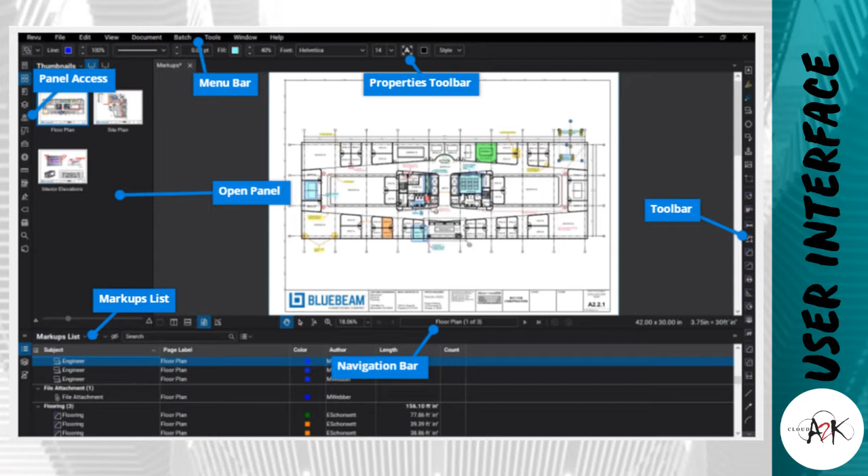But the big thing for Bluebeam is we're going to jump into using the tool chest. We're also going to be using, down the bottom here, Studio Sessions. And then lastly, we're going to open up the markups list. So with the markups list, what I really want to point out to you guys is you might just be sharing drawings and doing some markups, but I really want you to have a think about the data inside the PDF.

And what I mean by that is if you're using AutoCAD, you've got attributes you might have in the title block. It's a bit of smart data that you can use within AutoCAD for printing or for blocks and so forth. In Revit, it'd be your parameters. And if you're deep inside Revit, you can see the power of those parameters and how you can manipulate a model, then this is like a BIM light. I'm not going to try and compare it to Revit, but the data is in there and it can be manipulated. And who said what?

So as promised, not too much on the PowerPoint because I'm more technical and I find that pretty boring pretty quickly. So let's jump in there. Just see if we've got any questions coming up. All good on the chat, nothing running.

Okay, so Studio Sessions. If I jump into this little logo here, Studio. Actually, I'm going to jump out first, go to my preferences, go to my servers and sign out. So Studio Sessions and Studio Projects are both on the cloud, on AWS, the Amazon server. Studio Projects is effectively like Windows Explorer, but on the cloud, or like Dropbox or Box. You can put folder structure in there and any type of file you want, movies, PDFs, Revit files, CAD files, stuff from MicroStation. It just saves stuff on the cloud.

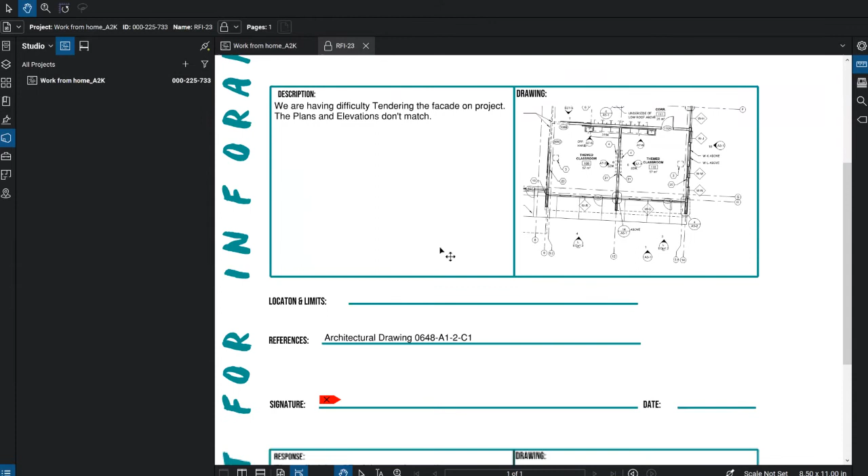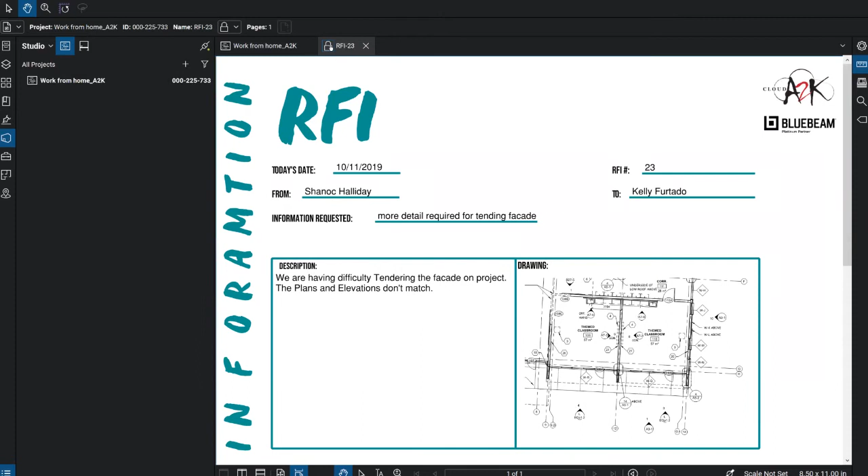And I'll go through this in another workflow in a moment. But what I want you to pay attention to is it's got a lock. So in the case of Studio Projects, it's a one in and one out type thing. So if I want to make an edit on this, I have to click on this and check it out, and then check it back in again.

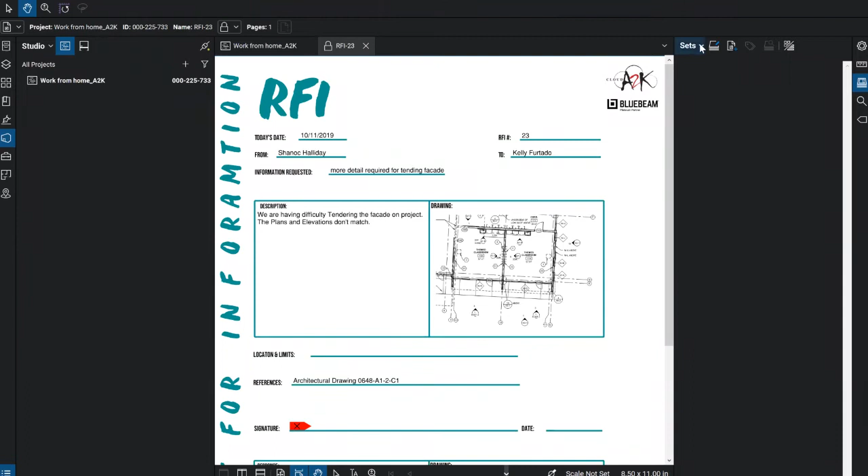Let's take this further and put a bit more information than just an RFI. So how about we go into another part of Bluebeam, and if you haven't used sets before, on our YouTube and on Bluebeam's, you've got sets and how they work. And there's some really good blogs out there as well. So I'm going to start a new set.

I'm going to add from my, now I could go from SharePoint, from an actual project itself, or my computer. If you want to log into SharePoint, there's a couple of tricks to get inside there, but it's pretty straightforward. Jump onto my Captain BIM CAD blog, I'll put some steps inside that. And I think they're inside the Cloud A2K blog we recently put out as well. So I'll go into my computer.

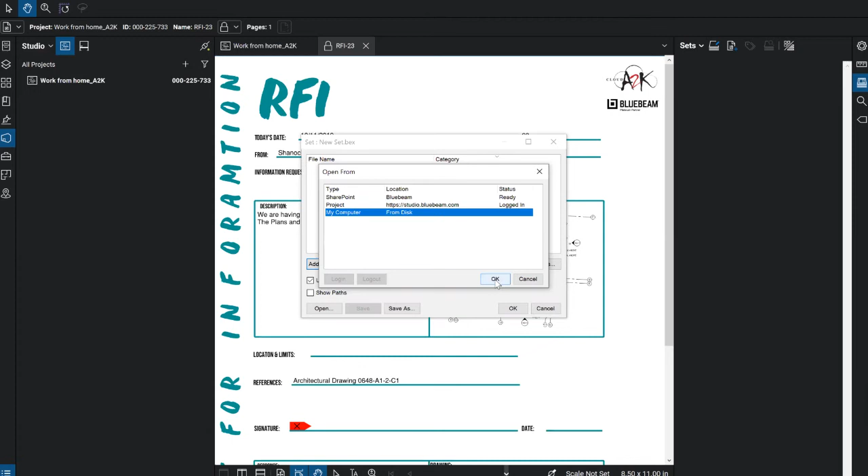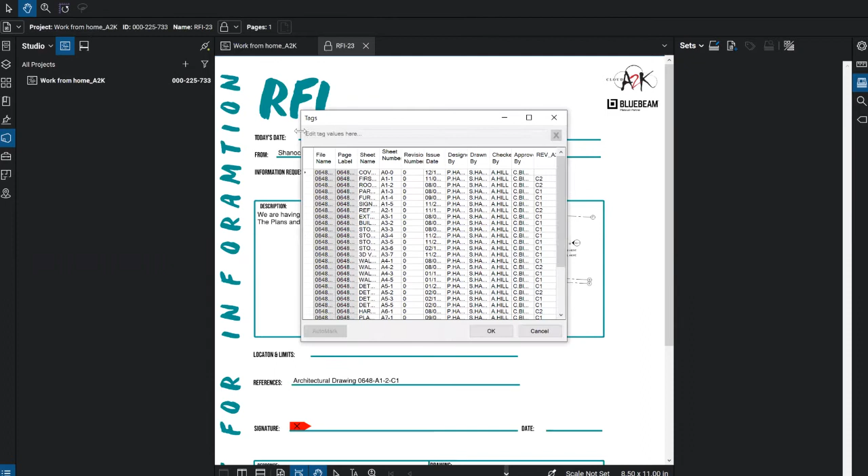Okay. And now we want to get into my Bluebeam and demonstrations. This one, I want to get a big project, PDF files, and latest architectural drawings. And I'm going to put these drawings into a set. A set is simply a document management system. And inside a set, we can have tags, which are effectively like parameters. And we can put information in about who's drawn it, who's checked it, revisions, and so forth.

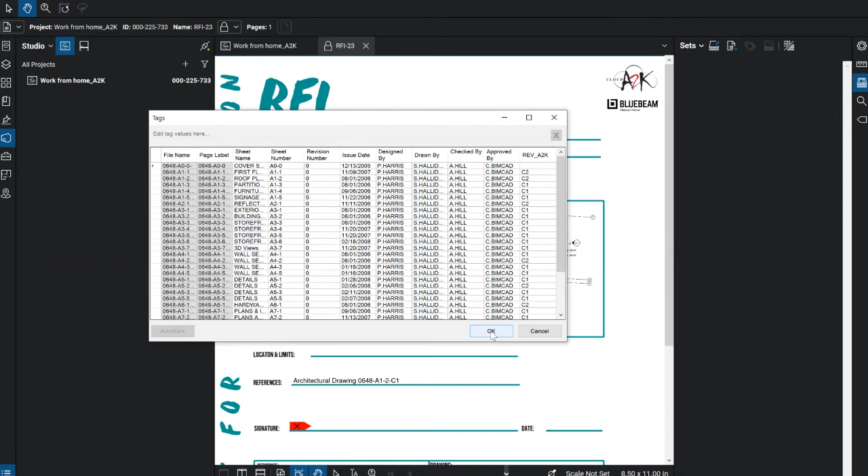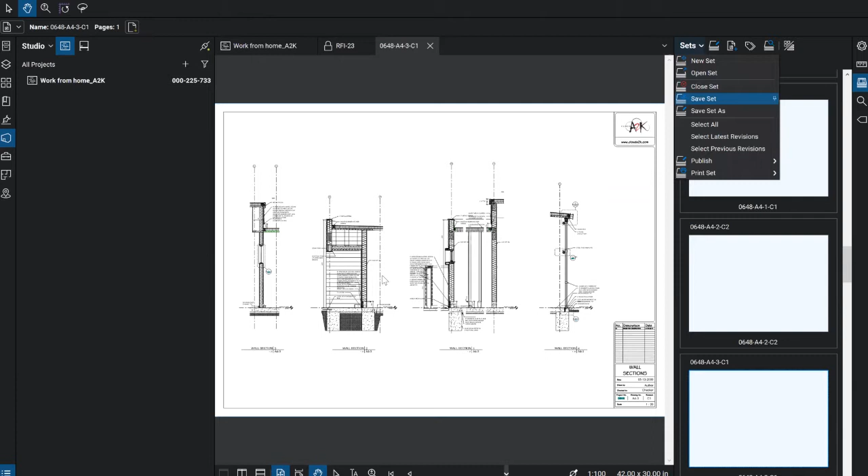What that means is we've got an opportunity to have something that we can then hyperlink around to other documents. So I want to save this to the project. So I go to my sets, save set, make sure you have this set up because I've got a project already open. Okay, I definitely want to go into here. I could then save my set to here. So I'll do my work from home. Whoops, capitals would be better.

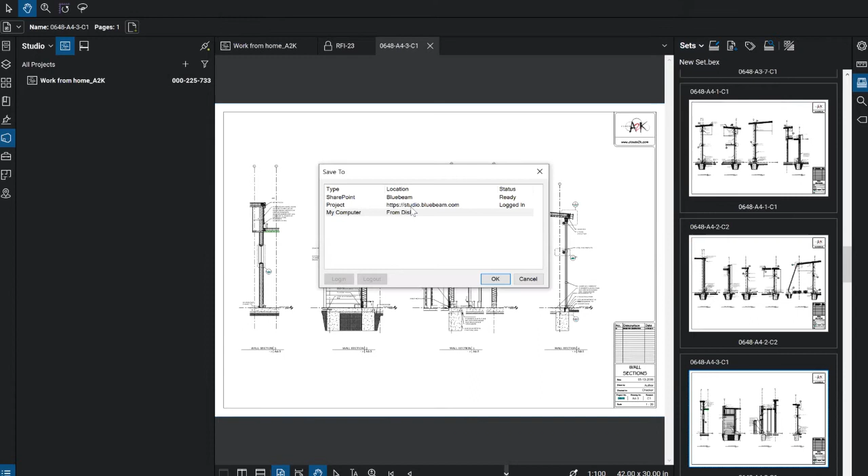If you're not too sure about sets, just while this is saving, I'm going to save as, where are we going to here? Computer, bear with me. File, save set, logged in, okay. Okay, uploading, that's better. Didn't give it a good name, sorry about that. So it's going to put that into our work from home, and there's our set.

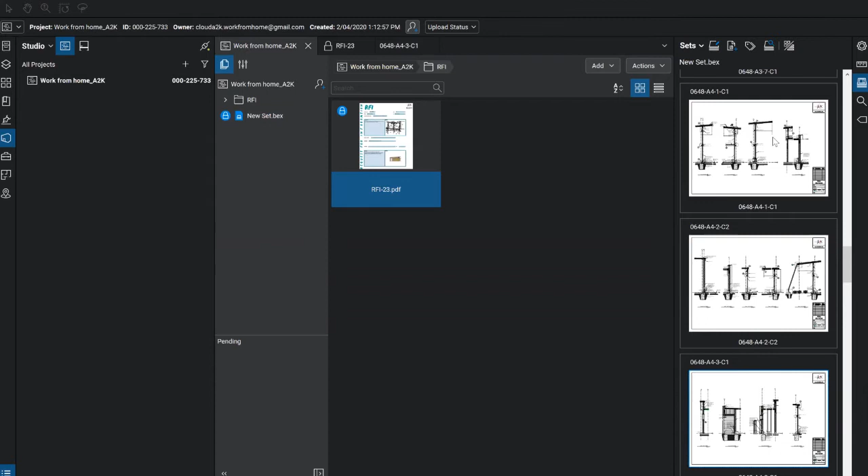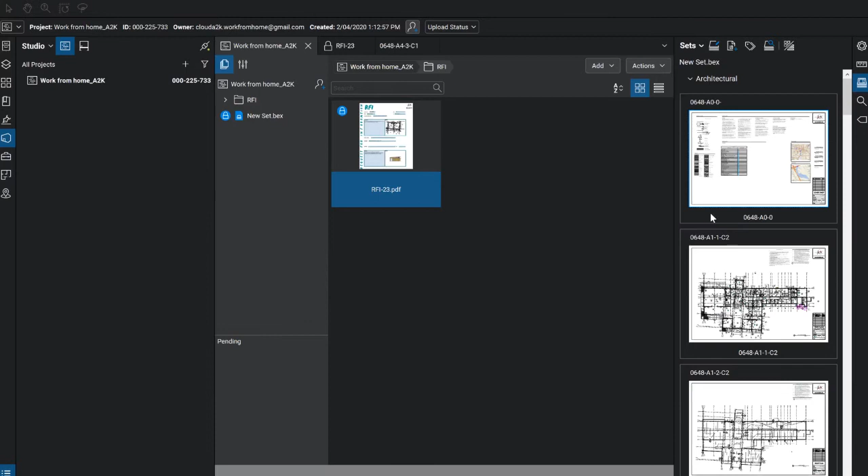Sets enable us to have an architectural set of drawings, mechanical, electrical, landscaping, specifications, whatever you want. It sits in here, and they're just individual files, but they behave as if they're one big file. The good news, especially for Studio Projects, is it means that I can open this up and I can use this to hyperlink around. So actually, I'm going to close this set, close that, sure.

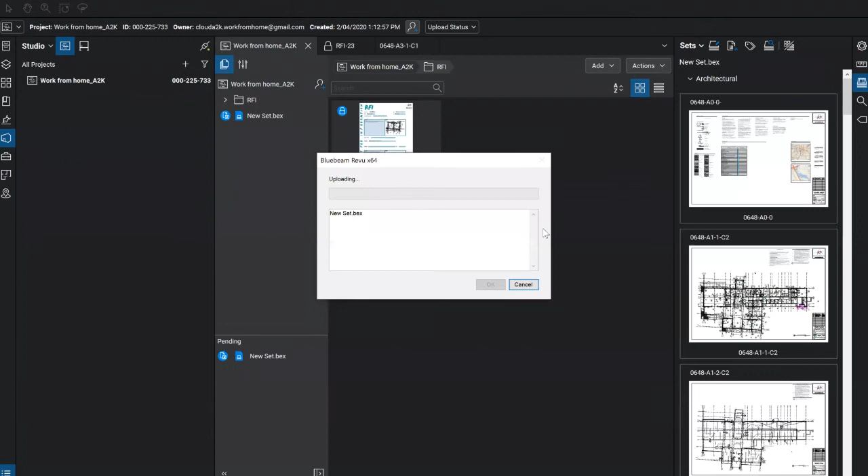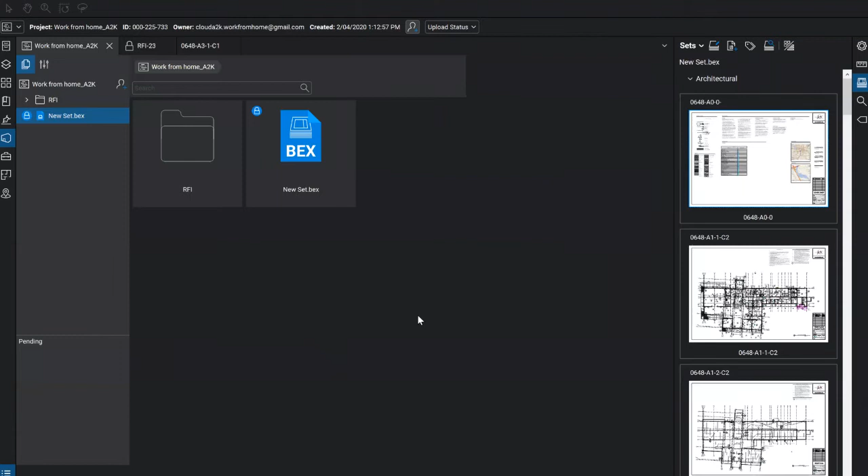I'll go for my work from home. Oops, just go away from my upload, sorry. Set, so now I can go to my new set. I wish I'd given it a better name. Click on that. So that one link will then open up my sets. So then in my sets, I can open up my document. And I can use this to hyperlink around my project.

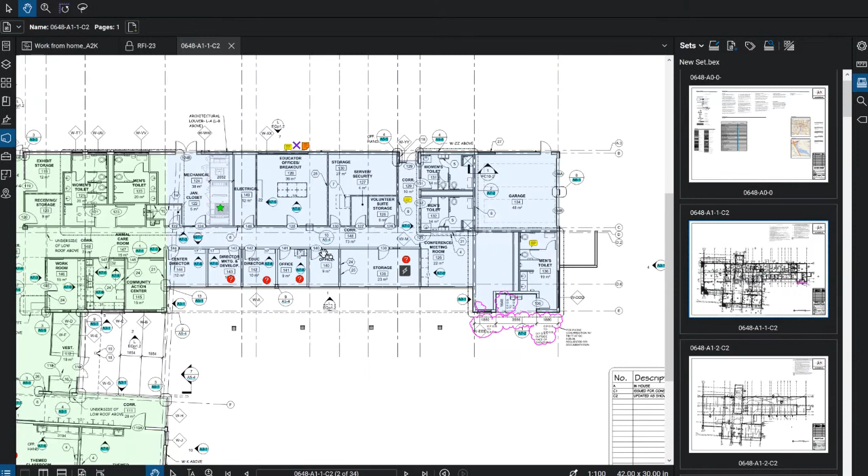I wanted to show you something as well with the sets, and that's in regards to this RFI that we have here. So if I did have an RFI, there's people working on site as well. So if they've got access to the internet on site, they can start getting onto these drawings, and maybe it's an RFI they want to do. Let me see, if I use the tool chest, I'm going to go down to my site RFI.

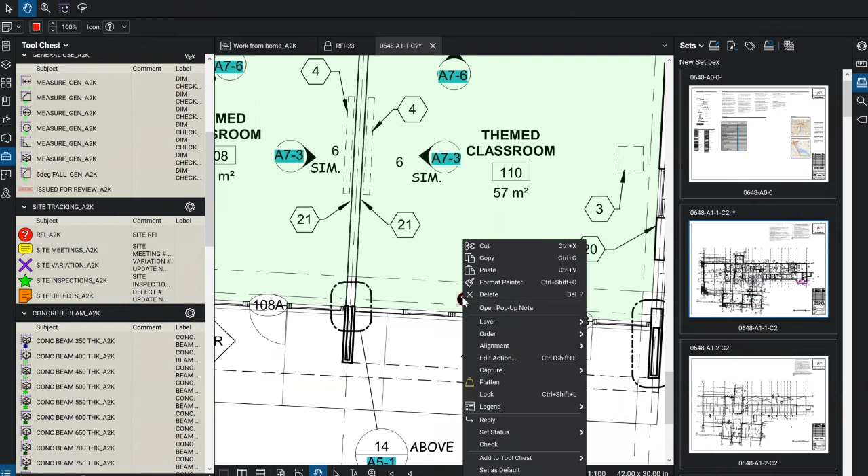Inside this, I'm going to type in there, I must remember, Jade, to change that from the green text. RFI number 23, facade issues. So I'm using this little note as a breadcrumb to tell a story of what's going on at the site. I can then right click, edit action. I can actually ask this to open up another file that's in my project, or maybe from SharePoint, your local computer, and say in my RFIs, I want you to open this up every time.

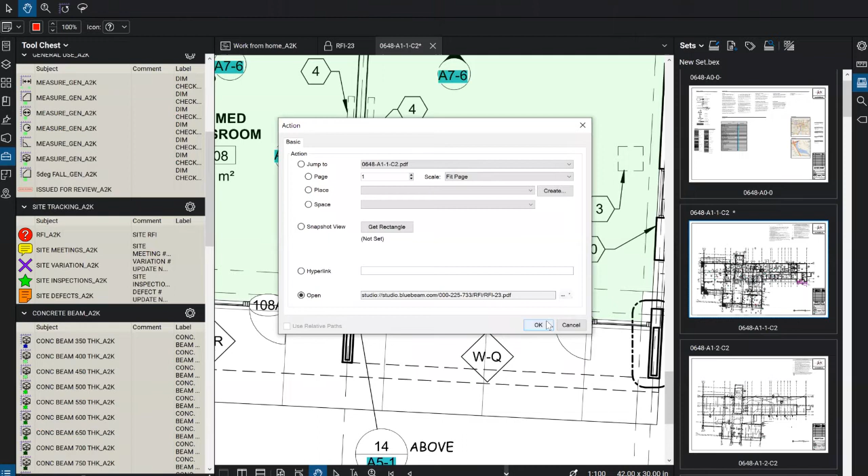So what I'm getting at, as a collaboration tool for PDF, I always like to refer to this as a storyboard of what's happened on site. How did you build the project? What issues you had, whether you be an architect, an engineer, the builder, or a subby, we each have a story of what happened on site. And let's be honest, it doesn't ever go smoothly. There's something going wrong. So how do we capture that so we can do variations later on, or obviously mitigate blame to someone else, because unless it's a carport, you're going to have an issue. So let's look back later on that you might have a,

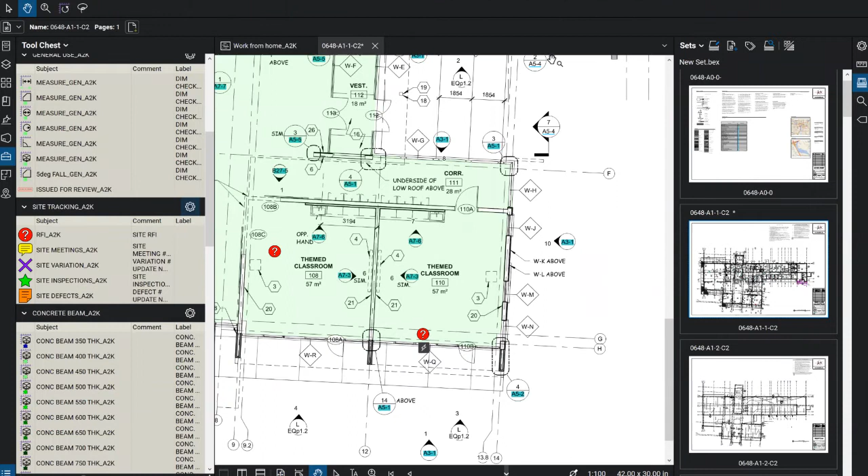Jade's asking if you're inside the session. No, I didn't invite you to this one yet, Jade. I'll invite you to the next one.

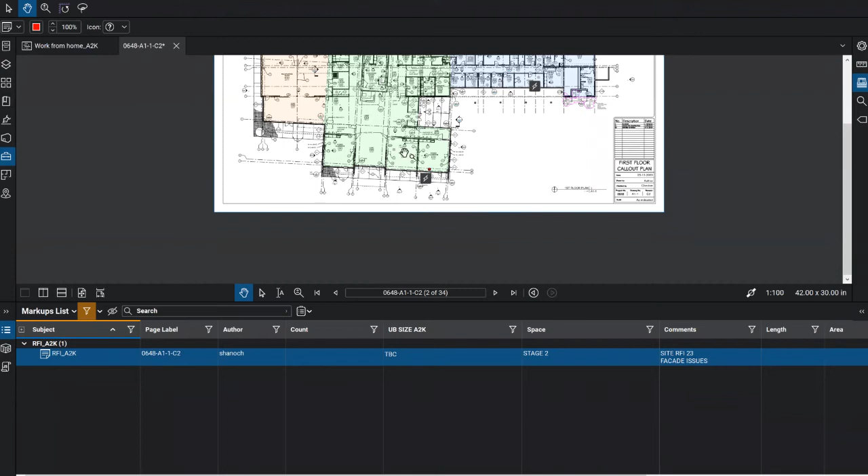So we will be inside this, and just think later on, you might be looking through drawings, and I can do a search here. I had this little issue yesterday. All right, I can go through here. I can do a filter. I can find all my RFIs. And here's my RFI I had about my facade issue. So we're using this like Excel to find information. So now I jump on to this little action. It's asking it to open up like a hyperlink, like a web tool.

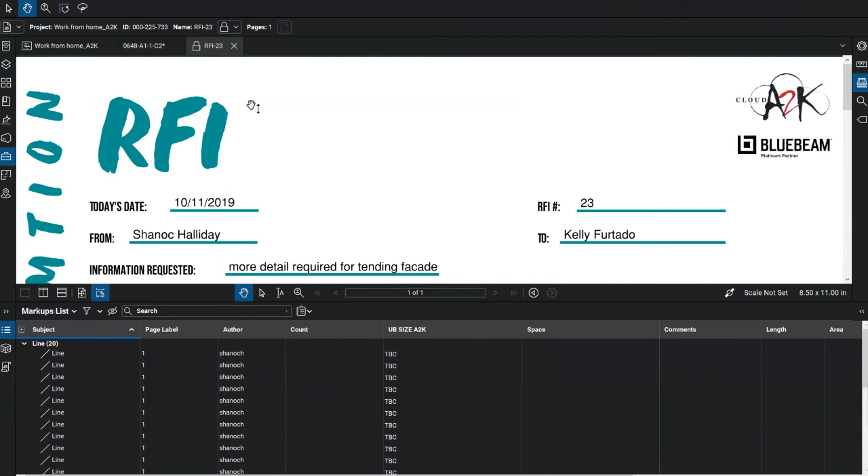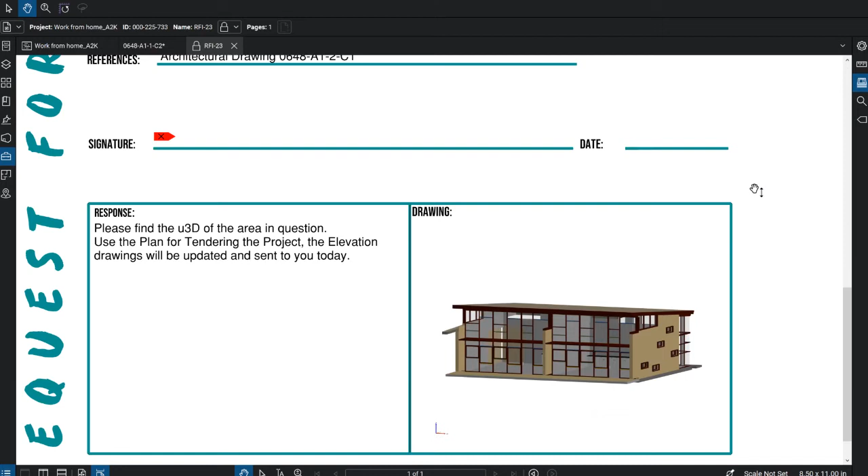And here's that RFI. So what I'm getting at is, you don't even need to check this out of the drawing. You can just have it as a tool that you want to hyperlink around and see issues from site. And there we can see, RFIs come back from the builder. I've got a 3D PDF inside here and answering things to the RFI itself. So now expand on this. RFIs, defects lists, variations, site meetings. You can now make the plan of that level the minutes of the entire job construction. Here's the history of the project. And we can all keep this on the cloud and share this around and access, dabbling in and out.

I must admit, there's one in and one out, okay? There's other workflows if you have to export a markup and put it back in later on. Let's see, any loose ends I want to get to on this? Projects, working from home, invitations. All right. Any other questions on this at all? Anyone got anything you want to bring up about this before I jump onto studio sessions? Give you time to write down if you want.

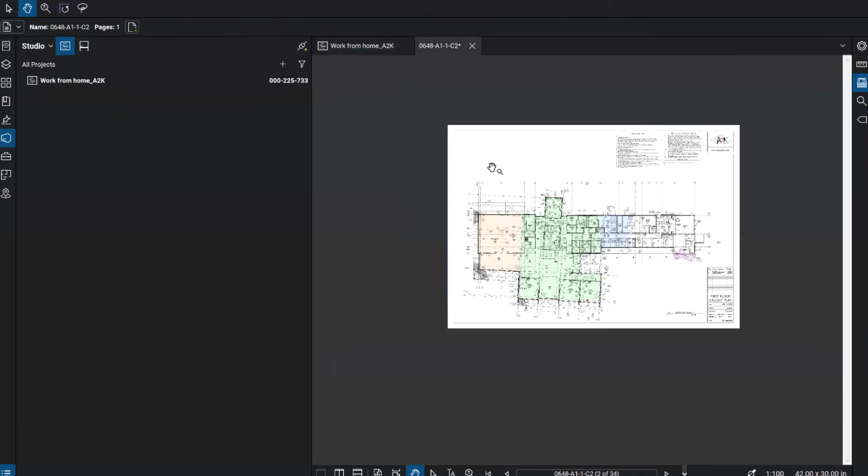So I'm going to take this now to the next level and create a studio session. It's very similar to what we did before. So we've got add and we've got our filter. And with that add, we've got a new session, or you might join a session. So if I do a new session, let's say it's a work from home cloud A2K. Inside here, I can start adding files. So I can add the open file I have in here. I'm going to wait for this to, no, I'll upload it. There it is. Get that one inside there. I can put in options other people have. Now, studio sessions is definitely set up for time periods. You can put a time bomb on when projects are due.

This is a lot of infrastructure are using this, where all markups must be completed by Thursday night, so we can start drafting on Friday and issue out for Monday morning or Friday evening issue, or whatever sort of reverse engineering of time you want to do. We can also look at restricting the attendees to this. So I'm going to say this is unrestricted.

So when we create a path, honestly, if you've got studio sessions, I'm happy for you to jump on in and just do some markups, because we could talk about how you collaborate with one another. I do ask you, put good content in there, because whatever you put in there, I can't delete. You'll see what I mean in a moment. So that's taking that to AWS, setting up all the protocols and permissions that we need to have done, and it's going to send back to me, and I'll have my studio session.

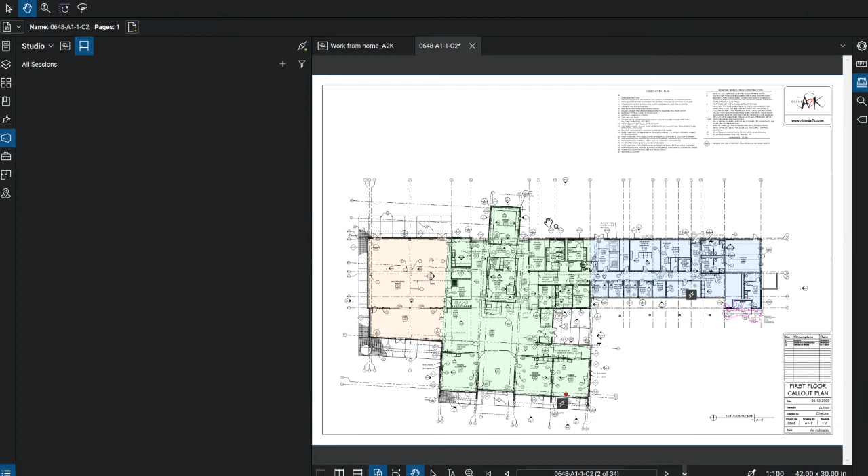Need some thinking music. Here we go.

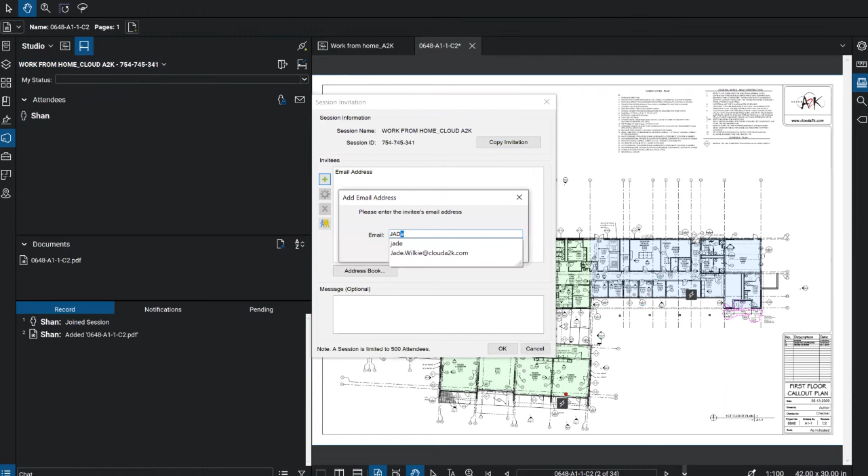Done. So for anyone who wants to join in, and you've got Bluebeam Studio and you have your account, if you punch in 754-745-341, you can jump in as well. Equally, I could copy this invitation and put it to my clipboard, or I can actually email people, and that's going to send an invitation to Jade.

That was also to point out the invitations. So you can do it as groups as well, just like within studio projects. You can do the same thing for studio sessions. Let's look at some of the permissions inside here. So in settings, we can change our name again if we need to. We can put the expiry date or take it off. I'm just going to keep that on here. So at 5 p.m. today, this will be shut down.

Here comes Jade. The attendees who are allowed in here, this is unrestricted. So once again, jump on in. And permissions. So I'll say, can't add documents, and you don't have full control, but you can do markups. You can save anything inside here.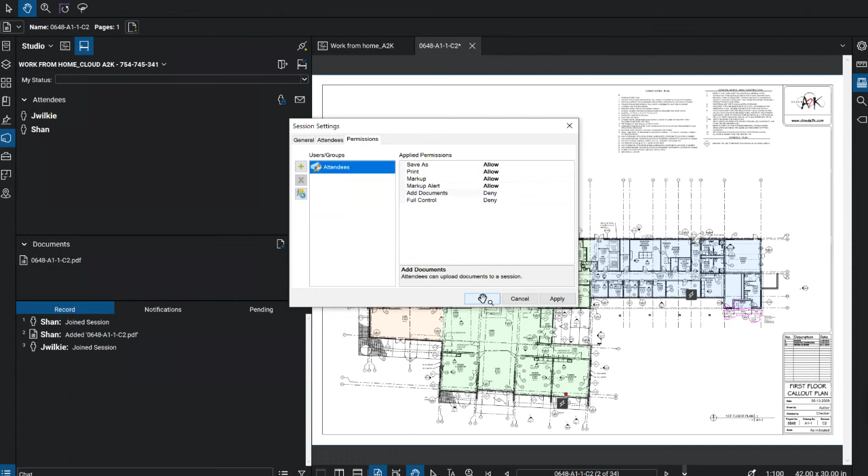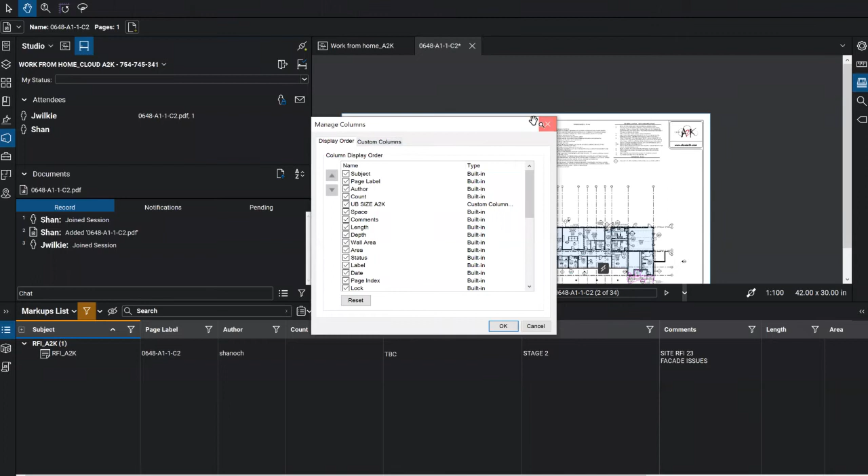Okay. Now, one tip with studio sessions is that if you've been using Bluebeam a little bit already, you might be using the markups list, right? And you might have tapped into custom columns. If you go into studio sessions, there is, whoops, let me get this one in here. That one's not it. That's just a regular one. Let's go into one inside the studio session, I'm sorry. If I go into this document, just to point out, I had just a regular project open, not a studio session file. So let me close this one down.

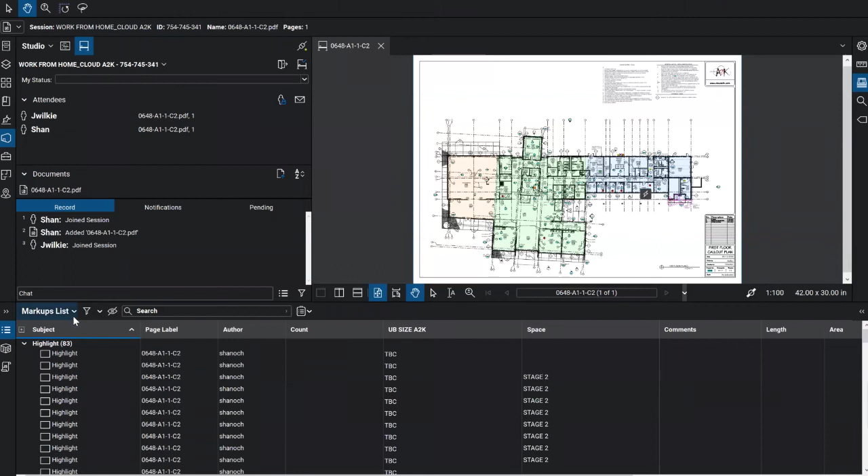If I go into my columns, manage columns, I no longer have something called custom columns. That's to say that you cannot customize this area once you're inside a studio session. So if you have particular things, like this is my custom column, UB sizes, or a quick one to flag is a responsibility custom column for review, keep that in mind. You can Google it, because there's plenty of good demonstration videos out there on YouTube of what responsibility choices are and how to make them. Just a nice little workflow there.

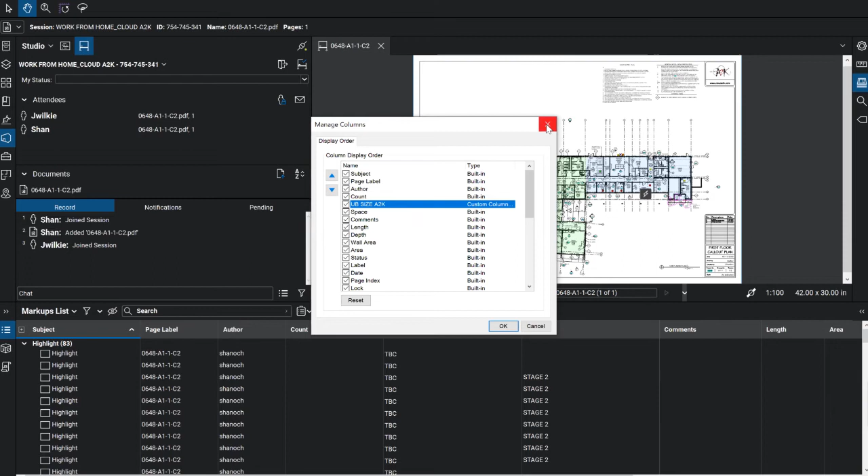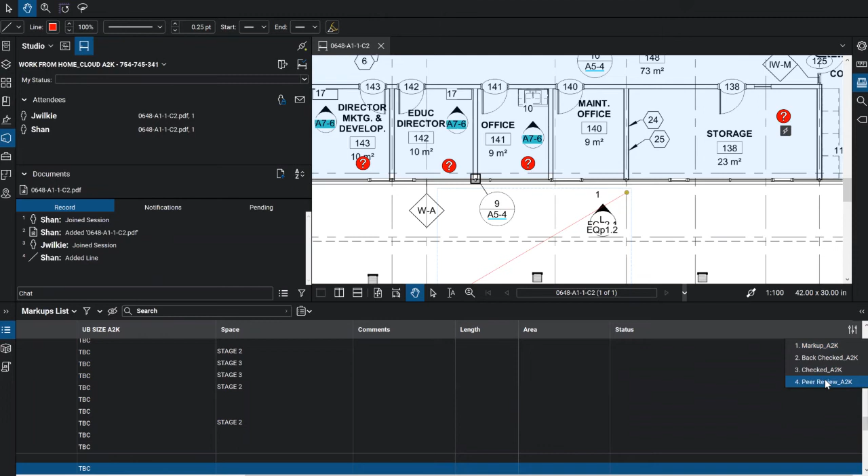And also, anyone who's used statuses, you'd find out that statuses inside here, you cannot edit them. If I do a markup, do a line, I want to go into my statuses. I cannot edit statuses. I only have the standard ones inside the system here. So statuses are another way of doing colors. I'll go through that in a moment. All right, that's enough about a bit of back of house there. Let's talk about some markups.

Bit disappointing, guys. I thought someone might jump in by now, apart from Jade.

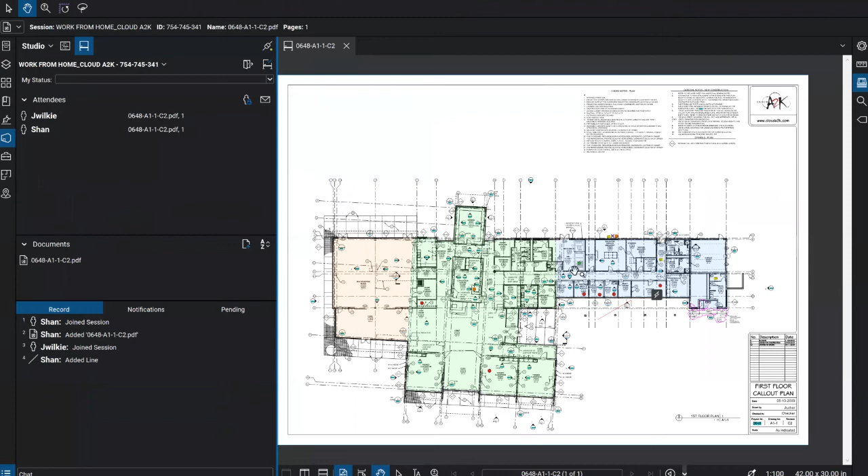All right, so any markup we do inside here, no one else can change. So even for these markups, I did this markup outside the session, so that's going to be locked down. So if I try and find, this is my own markup, I can delete this. But Jade, do you have a markup inside here yet? So if I go across, I get the author. Here's Jade's markup.

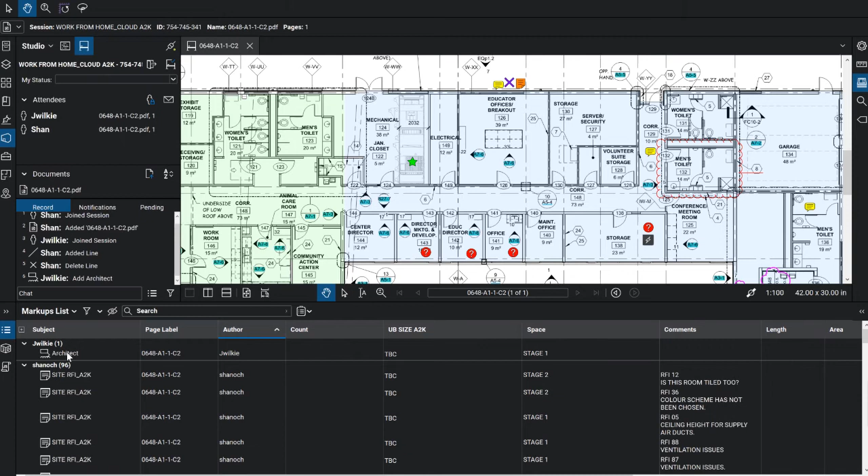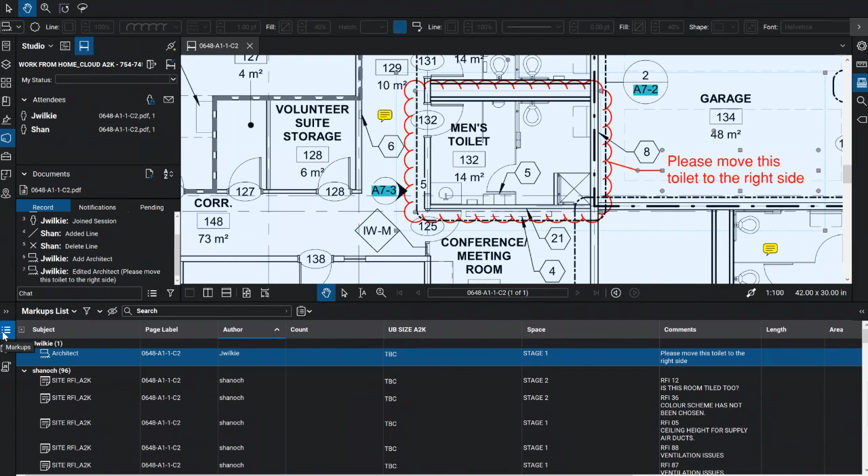In here, you'll notice that it's grayed out, little gray dots in here of how you would edit this, and I cannot delete this. I cannot make any changes. That's the way it's meant to be set up. It's for coordination between different consultants who honestly don't have to trust one another. So how do we make changes to this?

If I do not want to move the toilet to the right side, I can actually click on the actual markup, right click, and do a reply. And put inside here, I love it when I go and zoom, my reply seems to go into random places. There we go. Let's put in angry capitals. This has already been coordinated.

So what we're doing here is from a data point of view, we're having the one markup, but we have a trail of information. A very conventional method would be to put a text box here. So I'm just going to do T and then put my answer here. But honestly, that doesn't work too well because, oh, if I put an S in there, that would help. Because visually it works, we're right next to the markup.

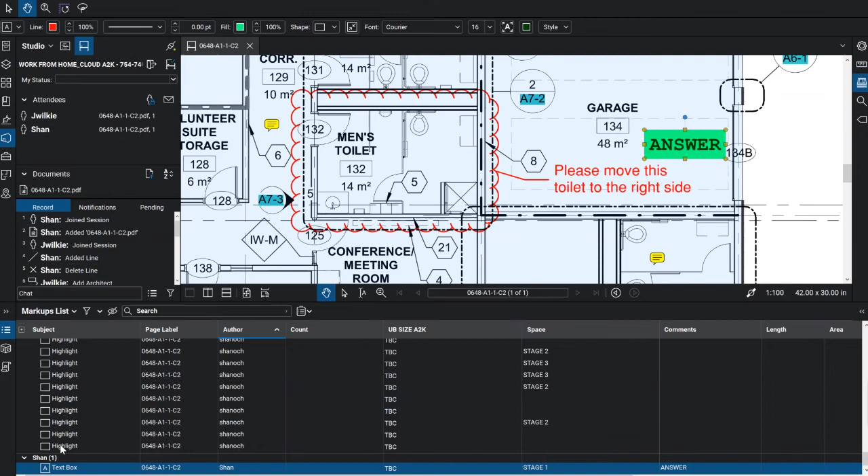But the reality is when you look at the data flow here, and if I extract information out of here, it won't combine these two as a logical markup. So reply works much better.

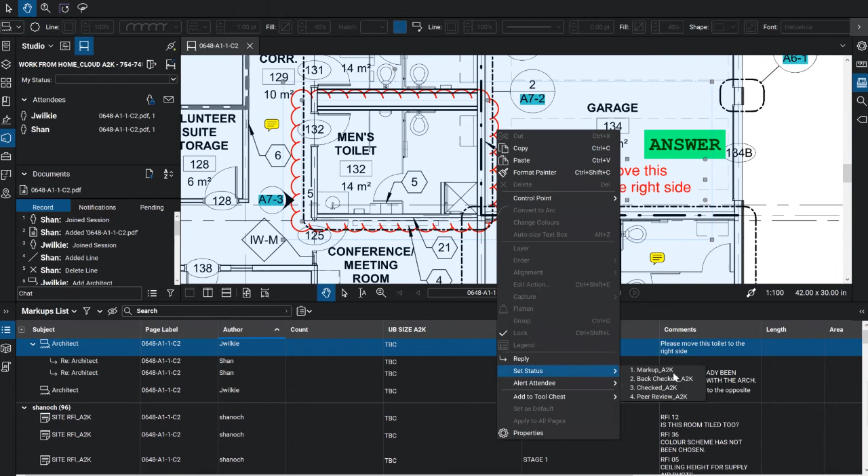From a working from home point of view, if this is Jade doing markups and it's in angry red, I can then go through the statuses and say it's been back checked. I've set these statuses up already, and there's on our YouTube, you can go into this. So I don't want to get too many technical details and overload people. But statuses we can set colors on. So there's my back check. I set my status that's been checked.

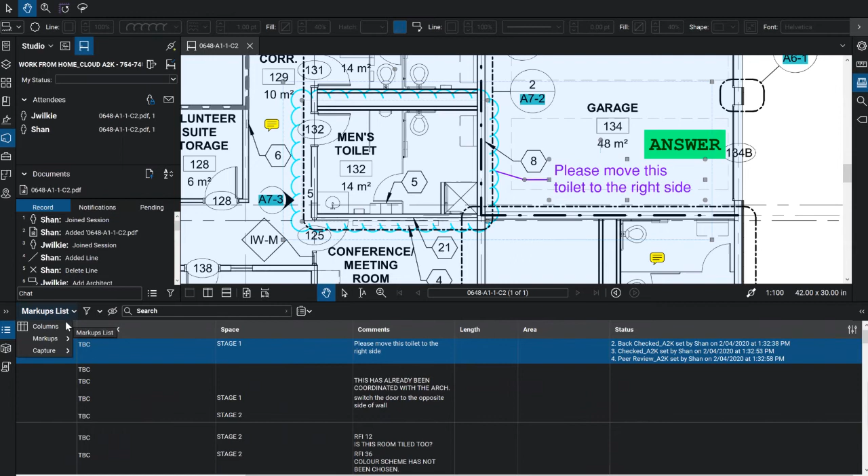And then in some companies I worked at, we've had a peer review. So what we can start to do is look at the data coming through this on our statuses. And I will point out here, I can drop some information off if I don't want to see the area or the length or the space. Might drop this one off and this one, keeping it simple or adding them in. And we can start to see the statuses. So it's got a timestamp of who did what and where. So what I'm getting at is you can have a whole people collaborating at the same time and keep track of who's doing what.

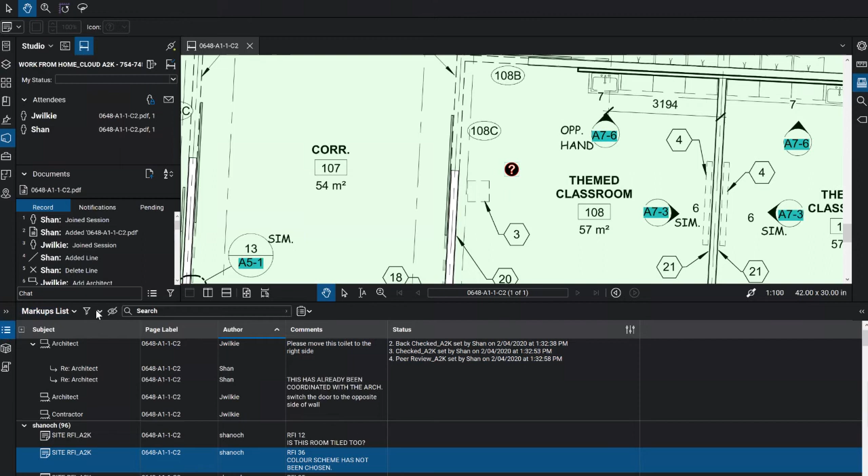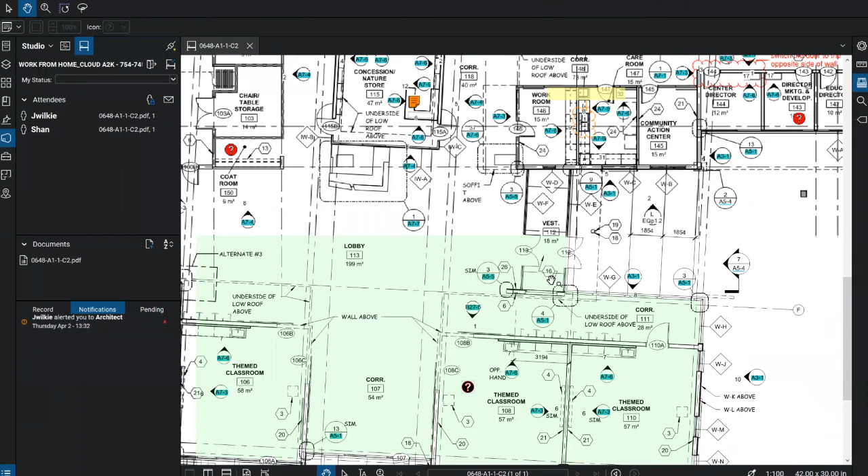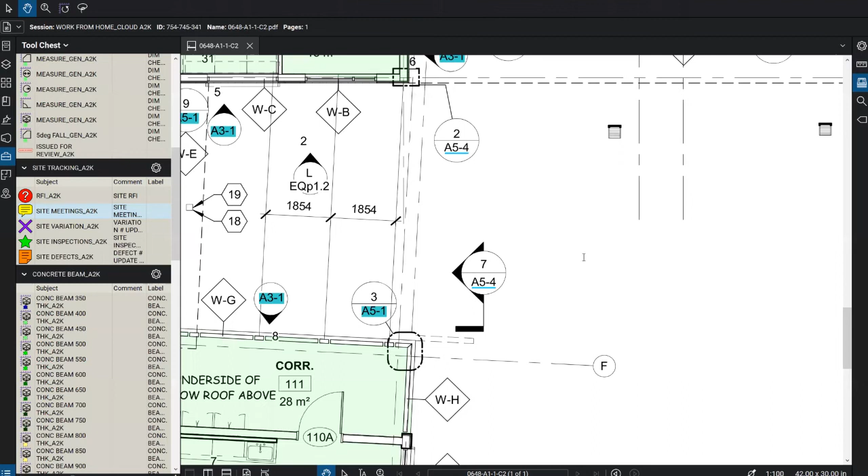Now, I wonder if I've got any notifications. Jade sent me a notification. So what this is, if I send one to her first, I'll show you how it all works. If I say, right, oops, I don't want to see that at the moment. If I do text, maybe I go from a tool chest, that would be a smarter move. Where's my markups? Did I not have it turned on? Here's some markup standards. I'm just going to put this into detail mode. I'm going to say it's an angry cloud and say update section mark. I think it's a number 18 or 16 instead.

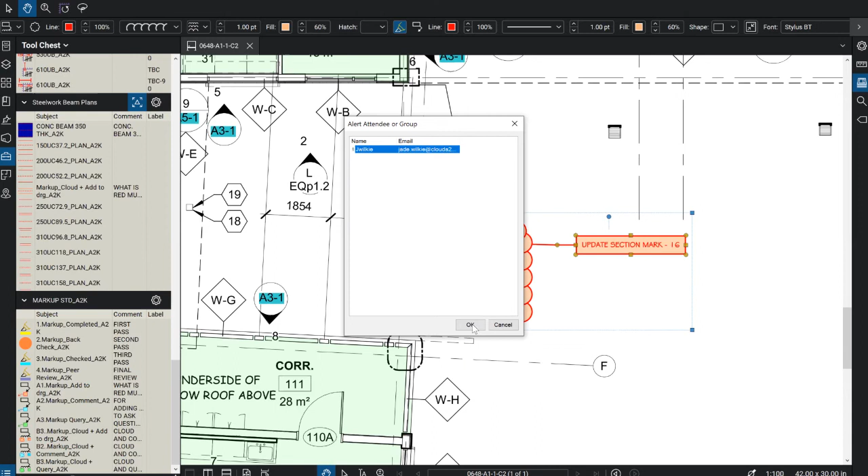But that can be something I can then alert an attendee, choose, and because Jade's jumped into the Studio Session at some point, she is now an attendee to this. So I can alert Jade to that specific markup. Now, because she's in a session, it's going to just come through as a notification here. So when I go to Jade's notification to me, it jumps straight to that area, which is great because you might have 75 sheets in here or 150 sheets or maybe only 3 sheets. But instead of having to sift through this, it's going to take you straight to that question.

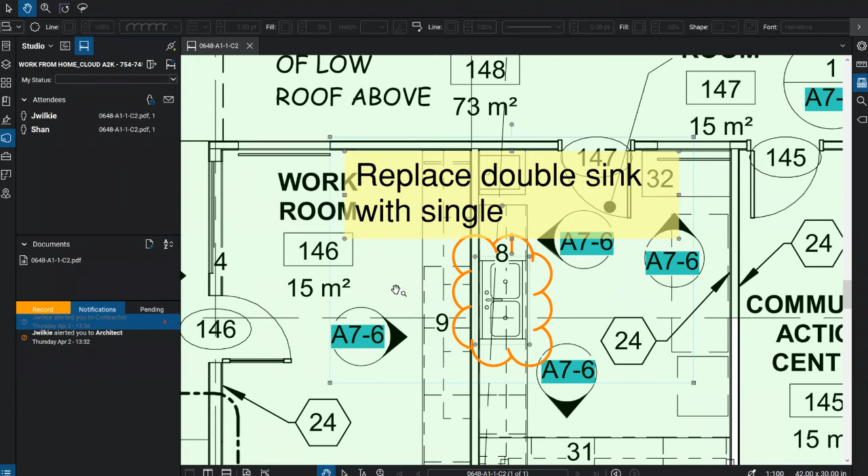So this comes really good also if you're offline, because then it acknowledges that you're not inside a session. So it uses your email to then say you got a notification about Bluebeam session, work from home cloud A2K, and from Jade or from Shan or whoever, and it will hyperlink you from your email straight into a Bluebeam session and log you in as well. So those credentials are set up and just quickly smash it out.

I've actually used this when I've created reports for clients. If they want to do some questioning back to me, instead of just doing a regular email, we actually put all the questions onto the report. Then they just send notifications to myself. So the report also becomes the minutes of where we want to take things further.

So I also think about the engineers I used to work with. Not all markups are correct or perfect, or maybe I just don't understand every markup. So this gives me an opportunity to query that markup and continue working on. And they can get back to that query in their own time.

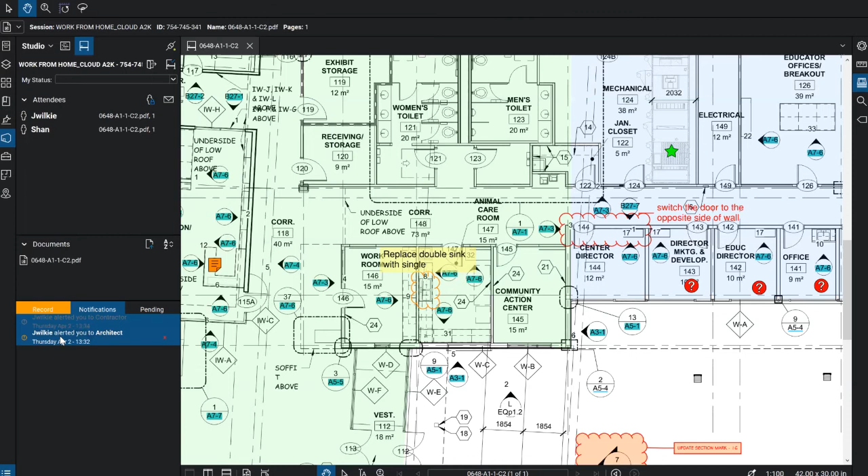What else you got for me, Joe? That one as well.

One thing worth pointing out: inside this is just one PDF, one drawing sheet. Inside a studio session, if you want to do things like hyperlinking around, they're not going to work for individual files as such. It's to do with the pathing back to AWS.

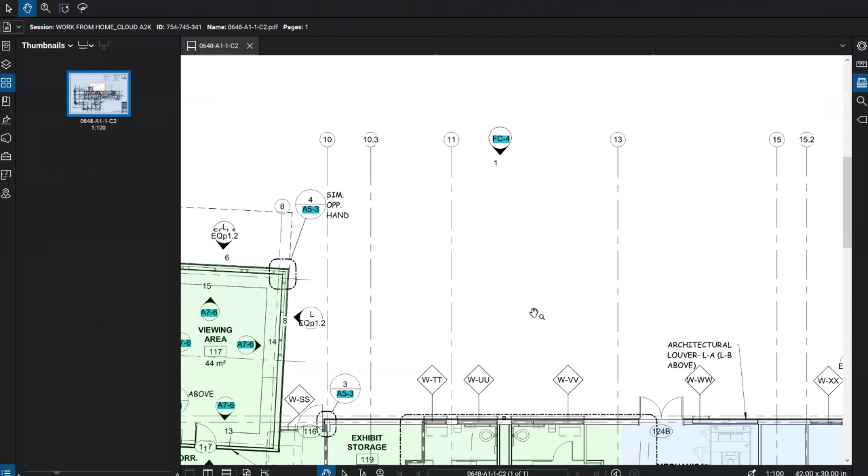So what we say is easier is to just combine. If you do a package of 20, combine them into one package. You can always combine them easy enough in Bluebeam, and break them back out later on. If the session is open for a couple of days of markups, you want to make it easier for people to jump around. So combine the files, set up some hyperlinks, and then people can quickly start smashing out all the markups and updating the Revit files, CAD files, whatever you've got.

How are we going out there? Let's see, no questions yet. Hopefully that answered you enough. That's good.

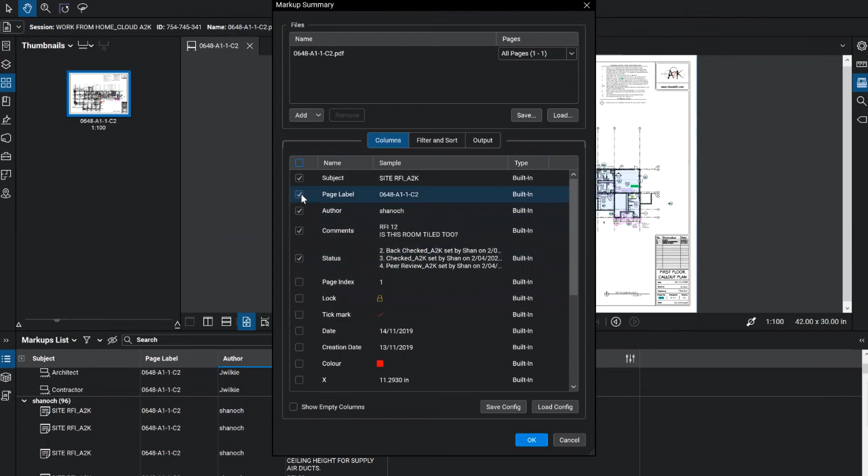So this is your mini Excel. We can say, right, I want to have certain columns. I don't really care about the page index, that's off, or the lock, but maybe the author's important. Actually, I think I need to have all these. But maybe I want to change it and have statuses up here instead. I just deem that as more important to me.

I can then look in the filter, and say we want certain information to come through - do I only want site RFIs, or do we want to put everything in there? Information about statuses - maybe you want to find out what hasn't been completed, so you can filter out everything else, or what is actually being peer reviewed. But let's keep everything on there to have a bit more information.

We can also do sort by. So I might sort by which author created it, or who it goes to, or by statuses. So you can see in order what's still a markup, what's still being peer reviewed, at different levels. And you can have multiple levels inside here.

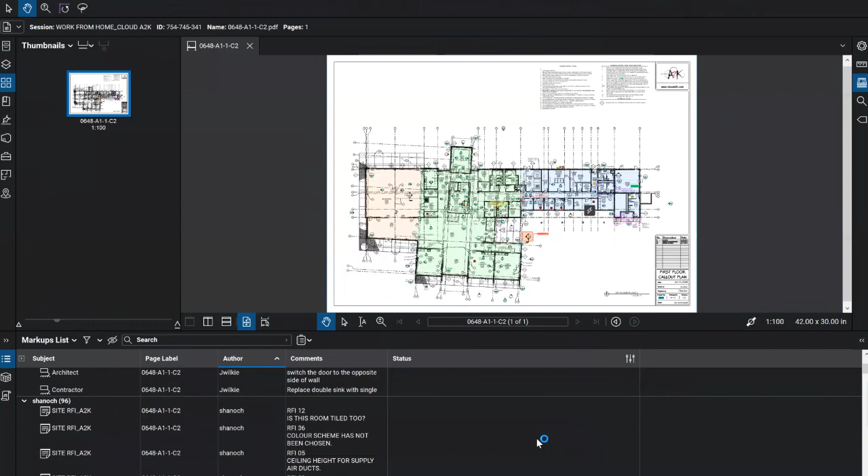So then we go to our output. Now I want to point out there's configuration - you can save this configuration and use it again and again, and share that configuration with your other work colleagues. Then you can always load it back in later on. So let's spit this out and wait for the Excel file to come on board.

And that's all the data we have from all the markups. A lot of companies use this information for quantity takeoff, but there's no reason why you can't use it for site variation lists. You can track them and send to accounts to see what's been going on, or for general site meetings, or just general markups - what hasn't actually been completed.

I've got 75 pages loaded. Quickly, Bluebeam to Excel, tell me what hasn't been completed.

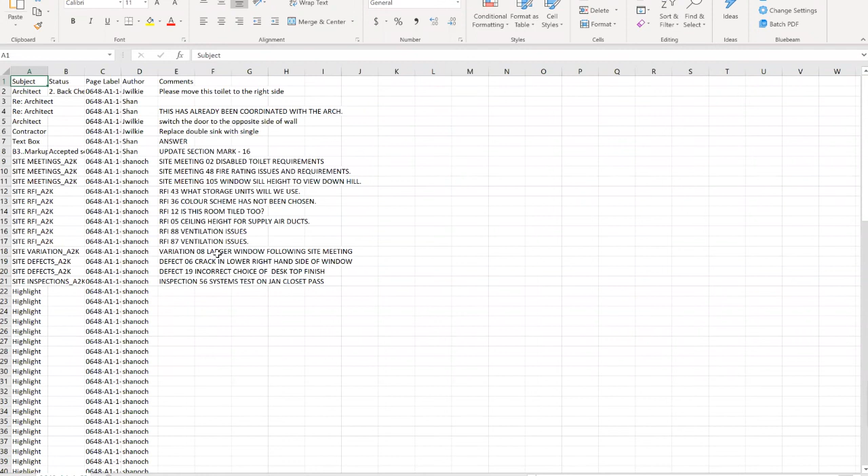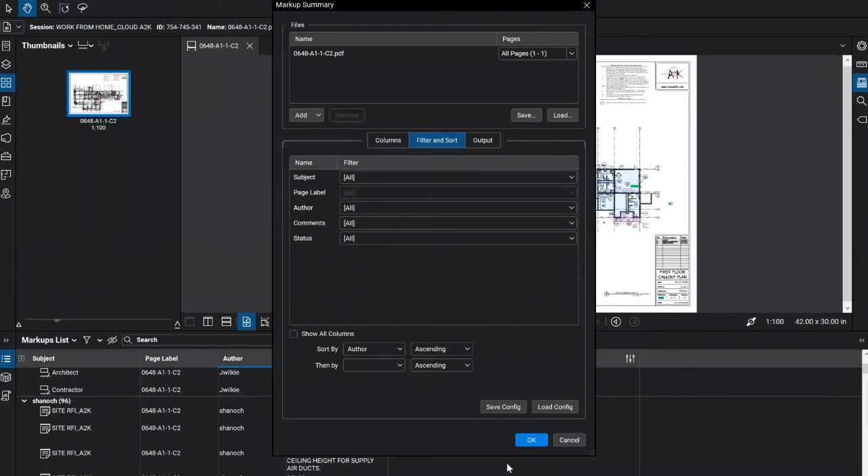There are other options inside here too - we can do a PDF summary. I'll just quickly knock out one of those. Normally you want to hyperlink it, but it's stuck inside the session, so I can't do that. These columns and filtering are the same as what we did for Excel. I'm just going to hit OK to have a look. It's telling me it can't do hyperlinks back to the session - that's perfectly fine.

These PDF reports are really good if you're, say, an architect and you want to do a defects list, specifically for the electrical contractors. So you can put a filter on there to say these are your defects for electrical contractors. And now I've got another one for the plasterers, or you could be an engineer checking what things didn't get approved in an inspection, and so forth.

I think the internet is going to slow down, so I don't really want to crunch this one now. Typically it's not too long, guys.

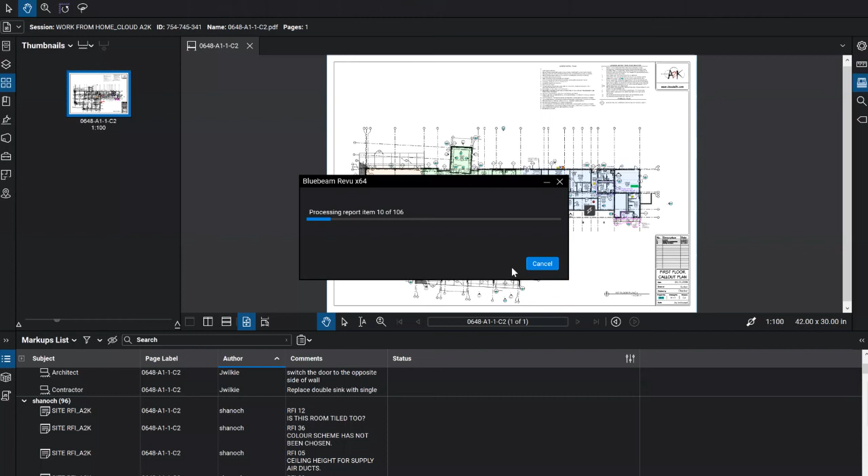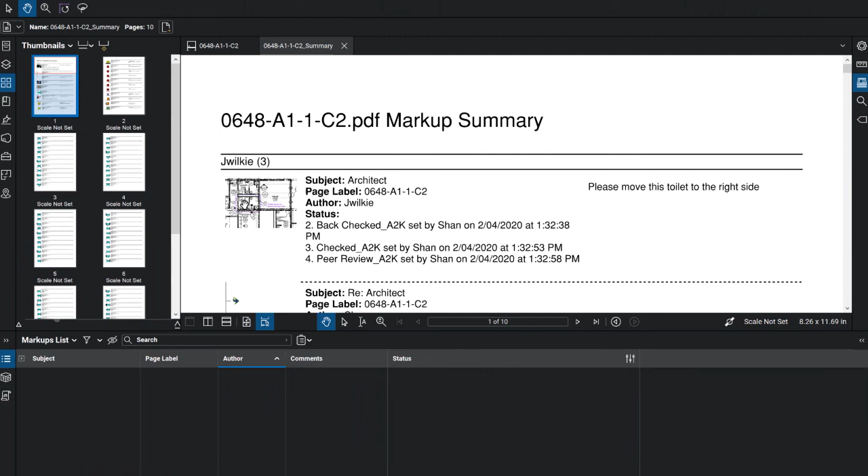There we go, so we have a little snapshot of the markup itself, whatever columns I had inside there, and the comments. It's actually a nice way of doing the minutes of the meeting. Here you can see where the replies come in. That's why using reply is better, because we can track the conversation and how we think it ended.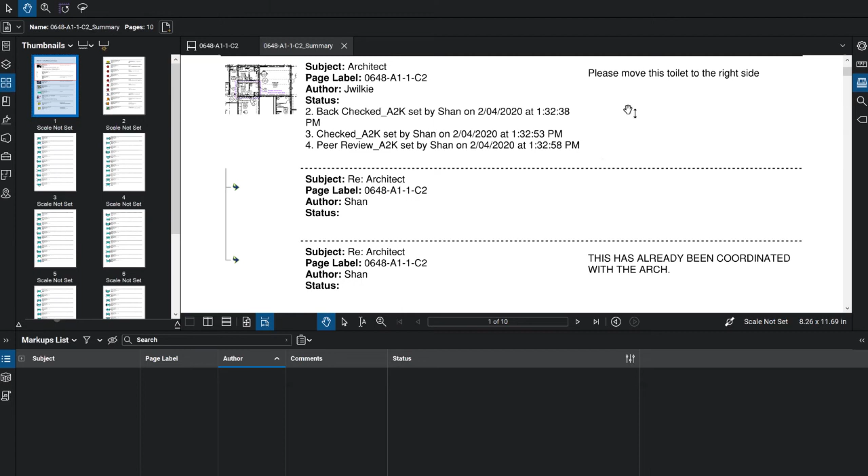Now, I think I've got a question on this. Can you add photos in each of the defects? Heck yeah, so let's get a photo in there.

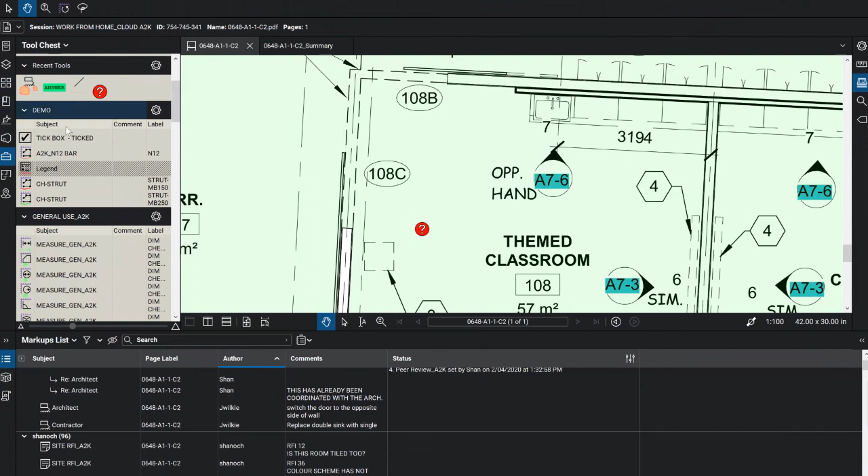So if I do this inside here, did I just... okay, I have to get a new one. I might be mixing up with Studio Projects. So let me come undone here, bear with me. In the tool chest, if I do any markup, it can have an action or a picture assigned to it. I can't do an action, but I can do a capture from file.

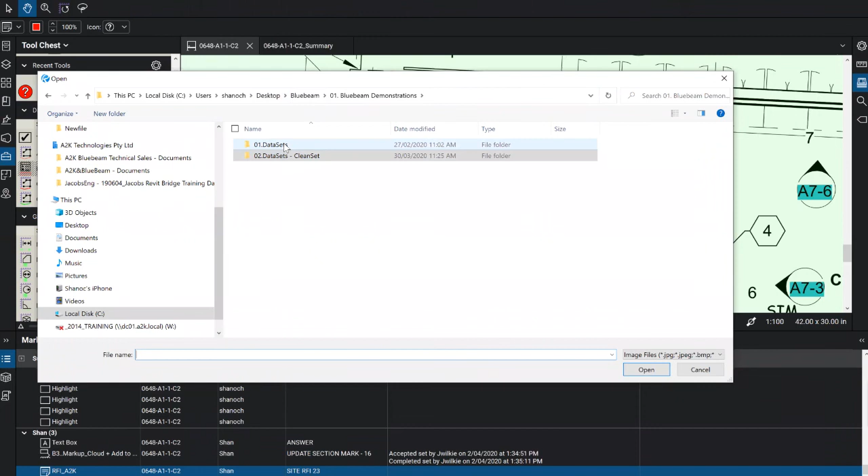So I'll go to here, go to my datasets, pictures, and I'll do this one first because it's funner - yes, I know that's not a real word - but you can then load in a 360-degree shot. So that takes this on now.

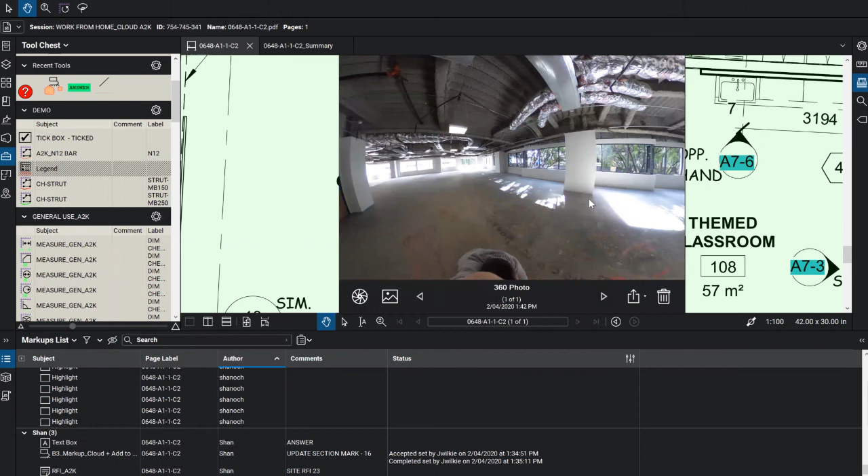And for the price of these cameras - we don't sell them, but they're not expensive - you get so much more information. Honestly, I think about risk mitigation. If you're just saying, look, we actually did all this ductwork right, this is actually just a godsend.

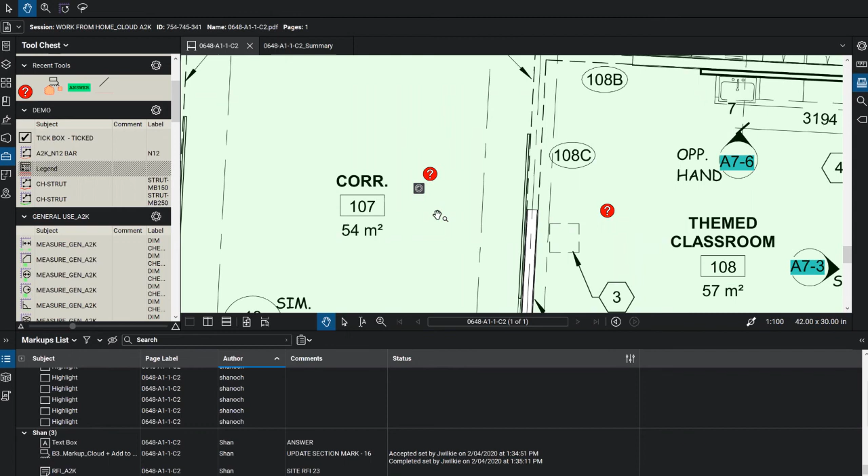You can also put videos into this as well, or just stagnant shots into this as well. So I'd suggest that you use the capture option, because you do not want to start sticking pictures on top of here so much, since everything inside here is important. You can't start covering information. I've definitely seen some clients do that as their own little report.

I'd suggest you tap into this, and when you do a PDF summary, these pictures will print up in the PDF summary as well. So that's a neater way to keep your PDF clean. Hopefully that answers your question there.

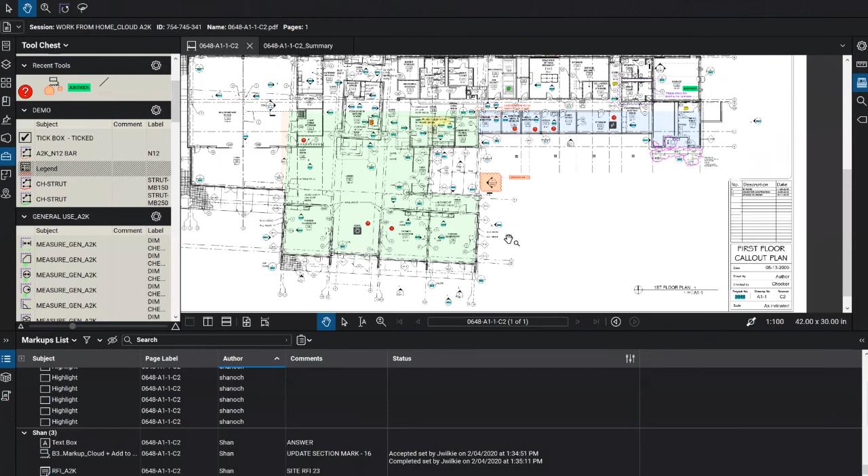Let's see now, elsewhere, let's just get out of this for a moment. So if you're working on a session - might be going for weeks, might be going for hours - but you need to get out, that's easy enough. I can leave the session, and then I can easily enough just go back into that session.

Now be aware with Studio Sessions that I am the administrator, as I've created it, so I have the permissions to close it and shut this down. Other people will not have those permissions themselves. I've been asked questions like, for companies that...

There are different workflows you can set up. I would maybe, if you've got ongoing markups for a project and you've got a team working on it - let's say a team of 5 on project number 1,2,3,4 - I'll do a session for that project and have one person as the administrator of the team, and just keep adding and removing files as you need. Keep that session going for however long the project lasts, whether 3 months or 6 months. You don't need to keep making new sessions for every revision markup change.

Equally, you could be a small company of maybe only 5 people, and think, well, we'll just make one session for the entire company, and I'll load up any number of batches of drawings at one time, and that's all our markups in one space. If that's how you want to do it, that's easy enough too.

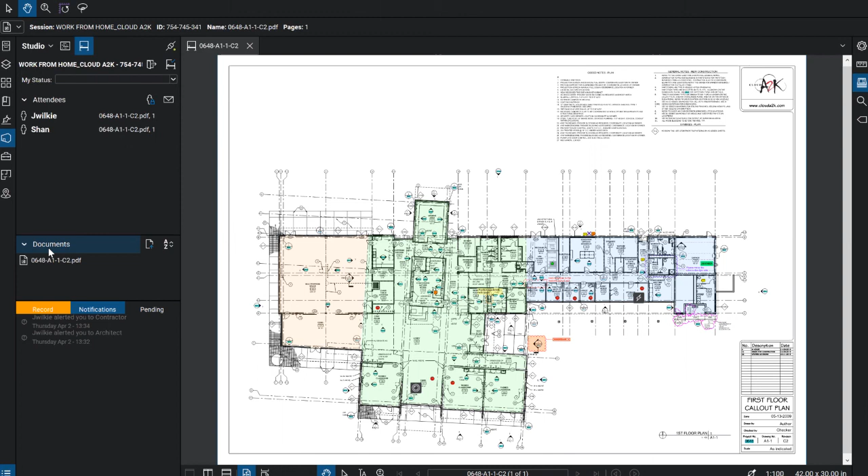All right, I'm just going to close this down now, unless there's anything else you guys want to ask. Actually, I did get a question the other day about adding more files.

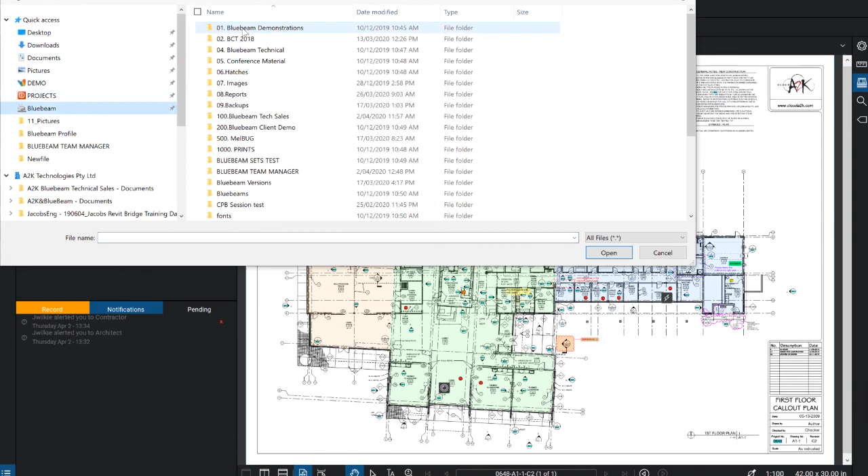I can add files into here, simple enough. So I can add from disk, and I'll just get into loading a raster file in here. Pretty simple and straightforward. And easy enough too, if I don't want a file, I can simply wait for it to load up, and then I can delete that file as well. So it's pretty simple to add and subtract.

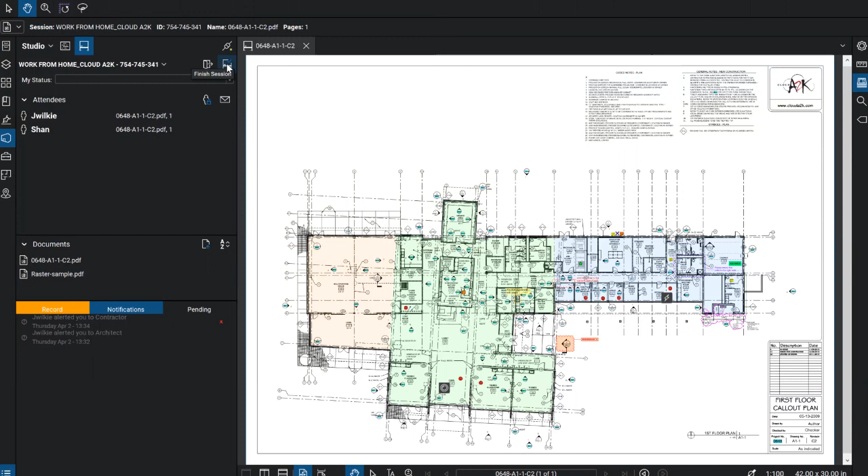All right, finishing up now, so I'm going to finish this session. It's going to boot everyone out. I can choose to overwrite an existing file. So if I brought this from my studio projects up to studio sessions, it's going to go back to studio projects and overwrite it. Or it could be on my C drive, or it could go to your server, whatever works for you guys, or back to even SharePoint.

We also got clients that point out there that use TeamBinder, which is now InEight, or we can also use a Bentley product, and I can't remember the name of it right now. It'll come back to me once we get off the webinar, I'm sure.

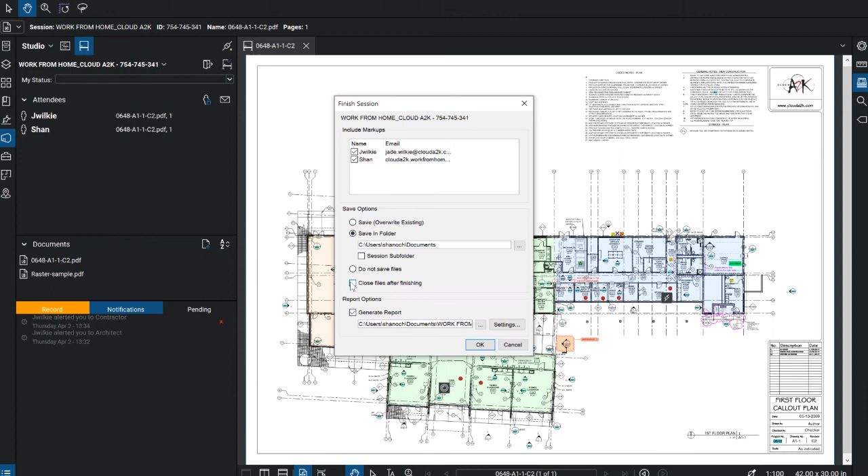We can also save this elsewhere, so it's a separate file altogether. We can generate a report from this and definitely want to close the files after finishing. So let's jump on here, create a report, kicking Jade out, and here's the report. I can see who the attendees were, what documents were inside here, just waiting for this to finish off, and then a complete record of everything that happened.

Now, if you're just doing a general markup, put a new bolt on here or move a sink over left or right, whatever, you're probably not going to be needing this, and that's fine. But if you're doing collaboration with other consultants, and it's something you need recorded as minutes of the meeting, or minutes of the PDF of changes you're going to make on site that could have other ramifications, here's something you can always go back to as well. So it actually becomes quite a powerful tool used like that. If you really want to, we can actually get this into Excel as well, but that's another workflow.

So that is our studio projects and studio sessions demonstration for today. There's probably other little bits and pieces to it, but I just tried to keep it fairly light. But what I've given you is definitely enough information that you can have a go at it yourself. If you're comfortable with Bluebeam already, the next step into a studio session or project is really easy.

There is a couple of steps if you want to integrate SharePoint onto it. You can track down the blog on Captain Bimcat on that one, which I wrote up about recently, or I'm sure some other good information out there as well.